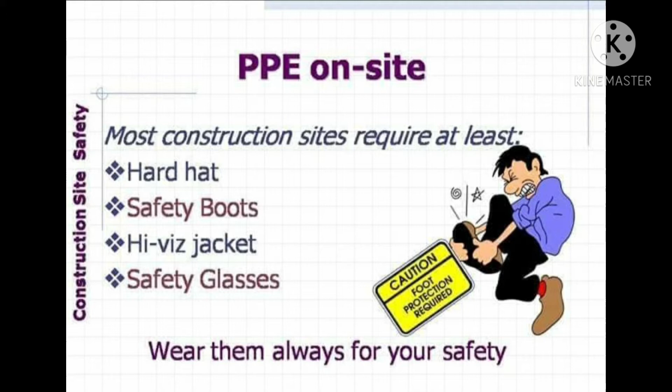A few facts. The first week on each new site is the most dangerous. Accidents are more frequent at the end of the day. Small building jobs are the most risky. Safety helmets, jackets, safety boots do prevent injury and death. Lightweight shoes such as trainers and runners are not suitable on site.

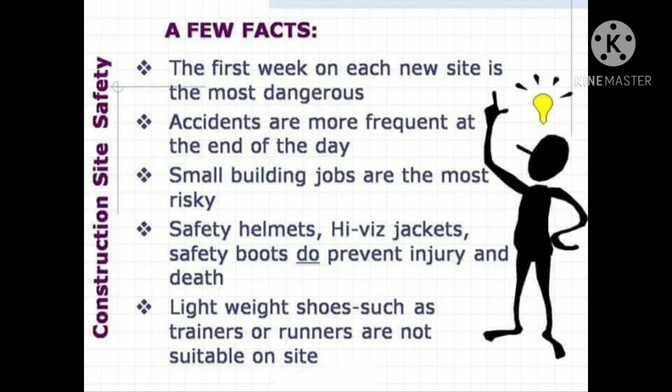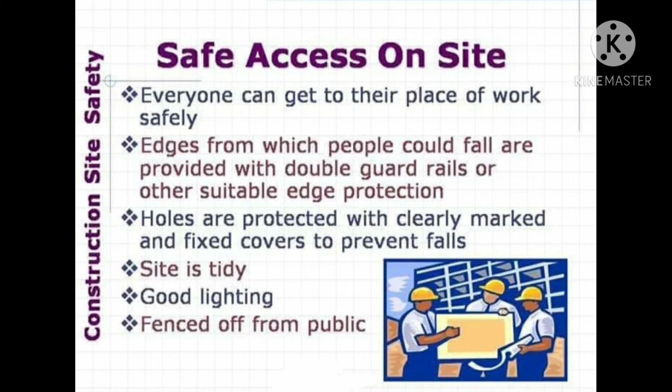Safe access on site. Everyone can get to their place of work safely. Edges from which people could fall are provided with double guard rails or other suitable edge protection. Holes are protected with clearly marked and fixed covers to prevent falls. Site is tidy, good lighting, fenced off from public.

Working at heights. Height hazards on construction site: holes in floors, gaps on working platforms, shafts, and stairwells not adequately covered, barricaded, fenced off. Using ladders or scaffolding without proper fixing is crazy.

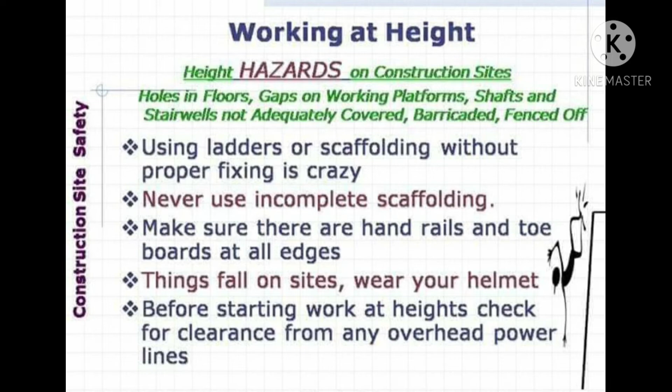Never use incomplete scaffolding. Make sure there are handrails and toe boards at all edges. Things fall on sites. Wear your helmets. Before starting work at heights, check for clearance from any overhead power lines.

Safe ladders. Never allow more than one person on a ladder. Use tool belts or hand lines to carry objects. Do not lean out from the ladder in any direction. If you have a fear of heights, don't climb a ladder. Do not allow others to work under a ladder in use.

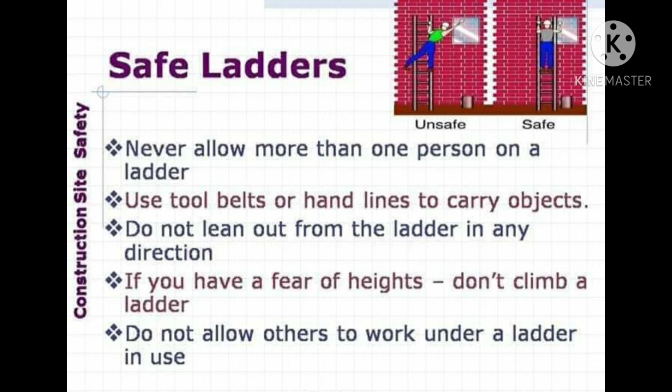The roof, a risky place to be. Always inspect a roof before you walk on it. You must have protection to stop you from falling from the edge. You must use proper safety harness and running cables when working on top of a roof.

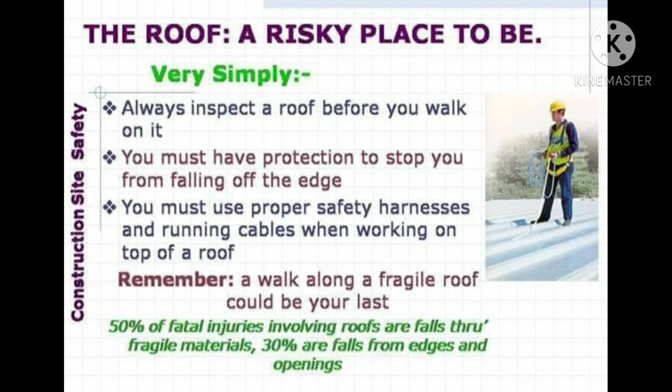Remember, a walk along a fragile roof could be your last. 50% of fatal injuries involving roofs are falls through fragile materials. 30% are falls from edges and openings.

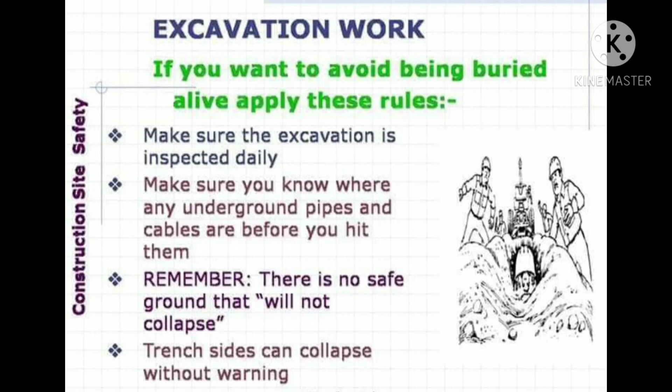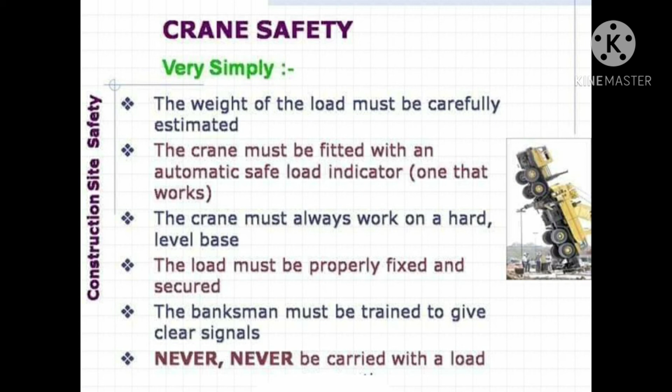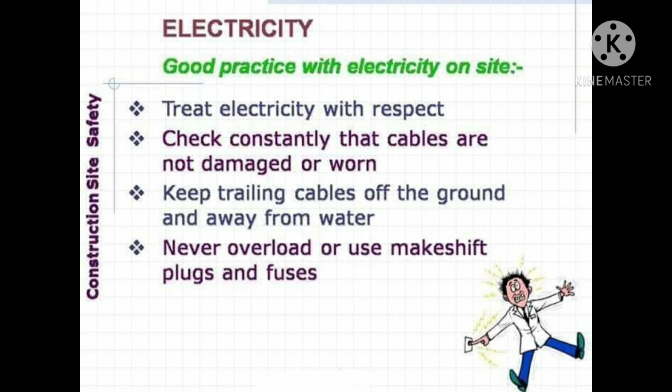Electricity safety. Good practice with electricity on site. Treat electricity with respect. Check constantly that cables are not damaged or worn. Keep trailing cables off the ground and away from water. Never overload or use makeshift plugs and fuses.

No job is so important that it cannot be done safely. Under no circumstance are persons working on this site to put themselves in danger. Best be safe today while working on site.